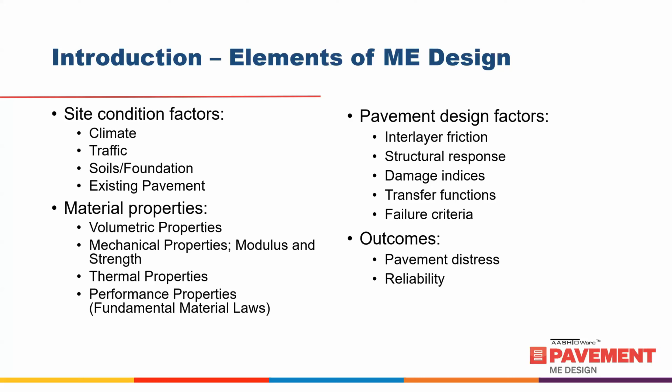There's also other design factors tied to your agency-specific properties, such as your failure criteria—when does a distress exceed that predefined failure criteria? And then the outcomes from this are your pavement distress and reliability. So these are the main elements of the ME design process and the different broad categories of inputs needed and used throughout the analysis.

And then how do those inputs and components feed into the final outcomes? It's a systems approach where you have your climate, traffic, layer properties, and design configurations. It feeds those inputs into a response model, which calculates your stress, strains, and deflections, depending on the models.

That data gets used within the transfer functions to define the fundamental material laws and damage. And then the damage is translated into your distress over time. So you'll have all of your distress prediction models and criteria.

So for flexible pavements, main outcomes are your bottom-up fatigue cracking, top-down cracking, thermal transverse cracking, rutting, and roughness in IRI. On the JPCP or rigid side, you have your transverse slab cracking, roughness, and faulting. And for CRCP, you'll have your punch-outs and roughness IRI.

So the question becomes, how are all these results presented to you as a designer when an analysis is complete? And that's what I'll focus on here for the next couple slides.

The summary of outcomes, the main goal of these reports, is just to summarize your results. That includes a detailed summary of the inputs used in the design and analysis. It includes calculated parameters such as mean values, aggregated on a monthly or even annual basis.

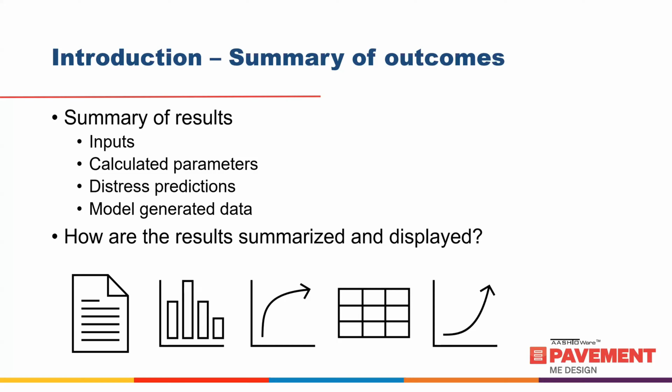So just a brief overview again of what outputs are available with a design run. With the last version of the desktop app and the web application, there's three main categories of reports output: your XLSX, your docx Word file, your Excel file, and then a zip download, which includes a bunch of other files that you've probably never wanted to look at.

It includes many different items that I'll go over in a minute. But these are your three primary outputs from the web app, and you can see a screenshot of how to download those once you have a completed design.

So to dive into each one a little bit more, there's two categories of output reports: the primary results outputs, and then a secondary result outputs. The primary outputs are what most are going to use on a day-to-day basis.

These include your Word file and your Excel file. Both reports contain primarily the same data. There might be some details in the Excel output report that might not be necessary or required in the docx, because you could just add a lot more detail of monthly values and so on in the Excel tabular form.

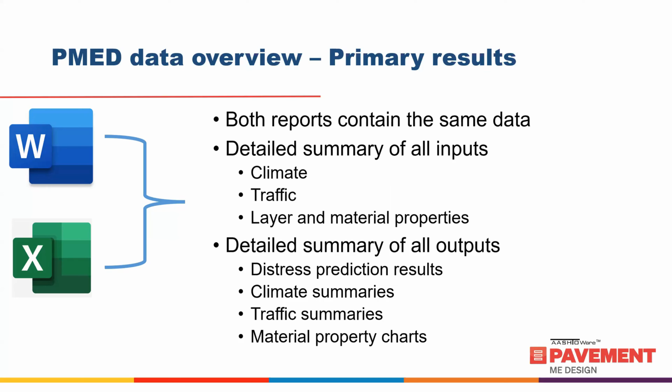Then within the secondary results, this includes, let's say, what you might have heard about in the past as intermediate output files. These are files not necessarily intended to be used as the primary source of outputs. Most of the data from these files are already included in the other reports in some way, and it's really an artifact of the original MEPDG software.

After 1.37A was developed, which relied on these files as an input and output for different modules, most of these files aren't necessary anymore at all. They're just an artifact of what was available in the past, and no changes have been made to those. It's just the way it kind of worked out, where they're still available for those who do want to use or rely on them for some reason.

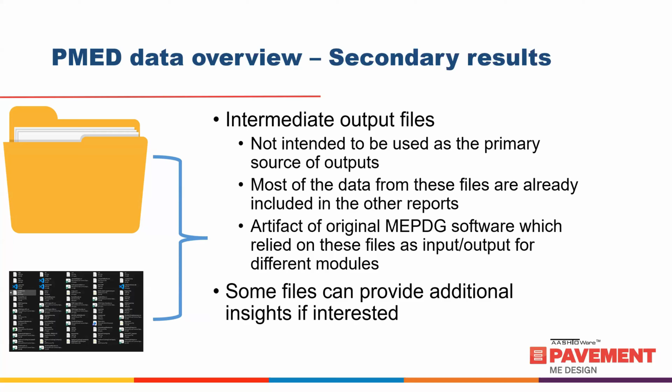And one benefit is some of these files can provide additional insights if interested. I'll provide a couple examples of that further on in the presentation itself.

So first, I want to do a detailed review and look at the different output reports. I'll go over the different sections, and then I'll just do a demonstration and scroll through an individual output report and show the different components.

So what I'll go over is the different headings. You have your design inputs, your design structure, design outputs and charts, which include your distress prediction summary and distress charts on the front page. Then you have detailed traffic inputs and charts, climate inputs and charts. You have your design properties and associated charts with those. You'll also have your analysis output charts, which add a few additional charts and figures to display some predicted results over time, whether it's distress or material values over time.

I'll show some of those. Then you have your layer specific information and input summaries for your asphalt, concrete, unbound materials, and so on. And then the last one is just a summary of your calibration coefficients and the transfer functions included. So I'll go into that right now.

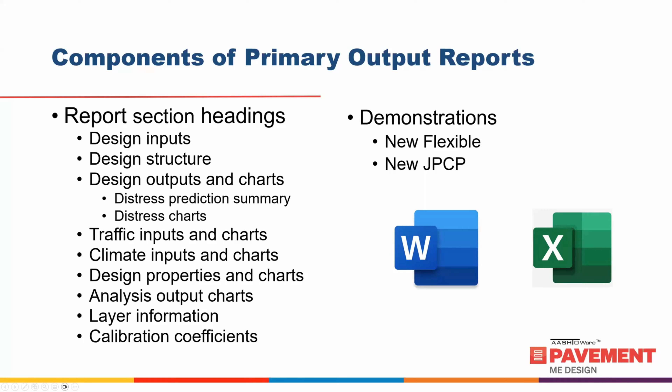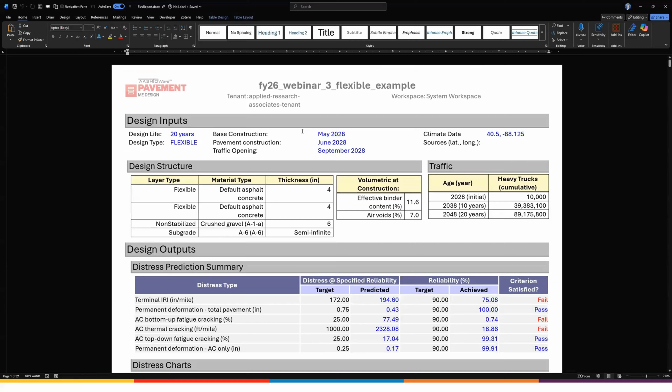I'll open a new flexible design. I wasn't saying anything. Wanted to open the flexible report and go over the different sections.

So first thing, you have your design inputs, which just summarizes some of your design life, your design type, base construction, pavement construction, and traffic opening dates, the general information. It gives you a brief overview of your structure itself.

So for this design, we have two asphalt layers, both 4 inches, over a crushed gravel 6-inch base and an A6 subgrade. It provides some volumetric at construction information, which is just tied to the first layer in the structure, the first asphalt layer. And then you have your heavy truck summary of your total number of singles, tandems, tridems, quads over the design period. So I created a very heavy traffic example here so that I can have some distress that shows up in the reports or the charts.

And this one, basically over 20 years, gives you a 20-year total heavy trucks.

The next part is your distress prediction summary. This is probably the most important of these reports. It shows you your target values, which is your distress threshold limits that you've defined in your design run, and each one for the different distress models. And then the actual predicted values associated for those models. These values are at the specified reliability.

So if you've specified 95%, that is going to be your 95% prediction value associated to the blue line on all these charts. It provides you your target reliability and then what was actually achieved. And then also the final one is criterion satisfied - did it pass or fail the specified limits? If it exceeds, it fails. If it's below, it passes.

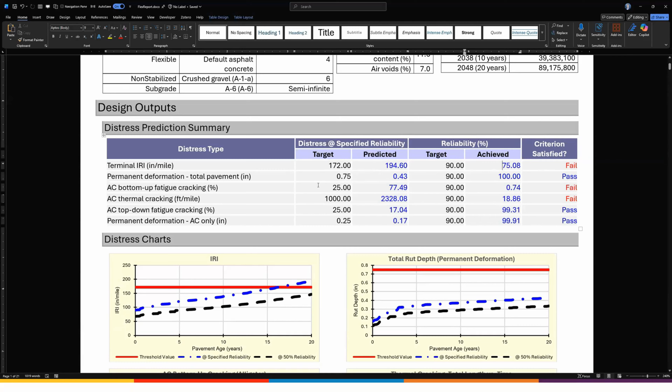Next part, your distress charts. So this is just a 4-figure summary. I know you can customize how these look or which ones show up in this first part. You're in the customized report section within the user interface, but primarily this just gives you a quick overview of how your design performed for these different distress models.

So in this one, we can see IRI. We have our mean predicted values, always the black line, as you can see here in all of these charts. And then you have the added reliability based on your 95%, or this one at 90% reliability level. So those are all the blue lines.

So the way I interpret this: okay, well, IRI failed at about 17 years. Rutting passed, no issues with rutting, but it's quite a high threshold. So depending on the threshold level, it can fail. If you have a very strict threshold level where you don't want any rutting above, say, 0.25 inches, then this design would fail fairly early in its design period.

Then for bottom-up cracking, at the reliability level we have about 11 years, basically it crosses about 10 years just to be safe. So we exceed the threshold of 25% bottom-up fatigue cracking at 10 years. And then for thermal cracking, it exceeds pretty early on.

That's kind of just a general review of what this page is. I'll dive into some of these little examples a little bit more of how this can be used for some planning and design decisions.

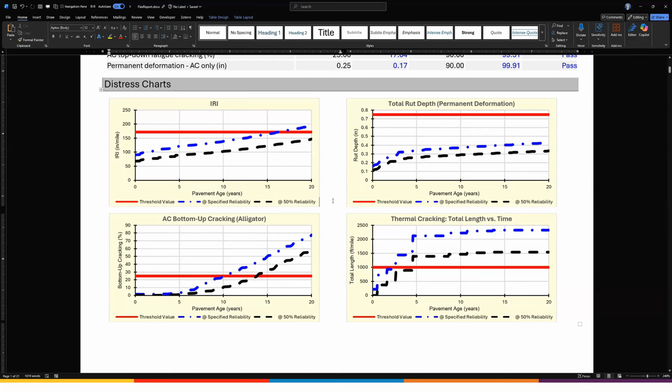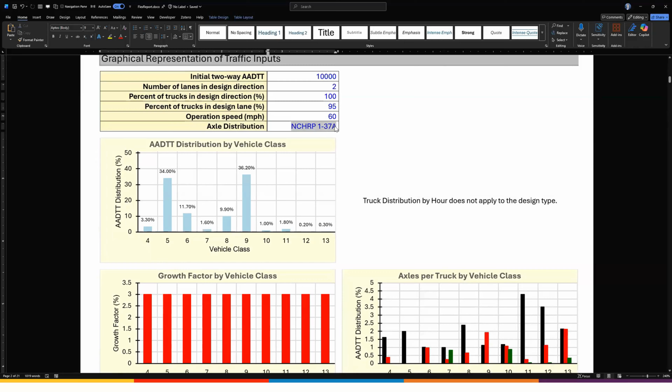Next part of the report is your traffic inputs. Basically it just summarizes what you've defined. If you have different axle distributions selected, it'll actually show which ones have been selected. If you use some of the predefined ones or your custom state-specific values, and charts of your AADTT distribution by vehicle class. You can see your vehicle class distribution, your growth factors by individual vehicle class.

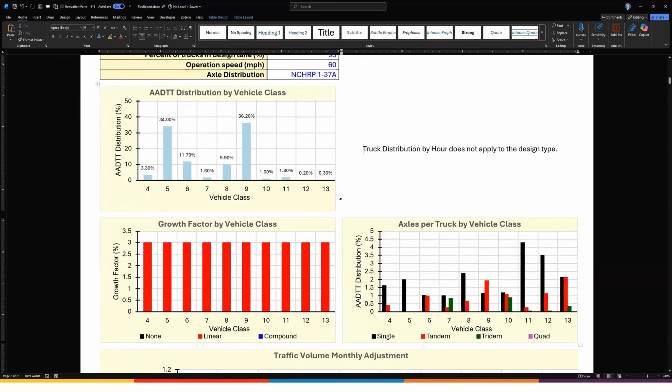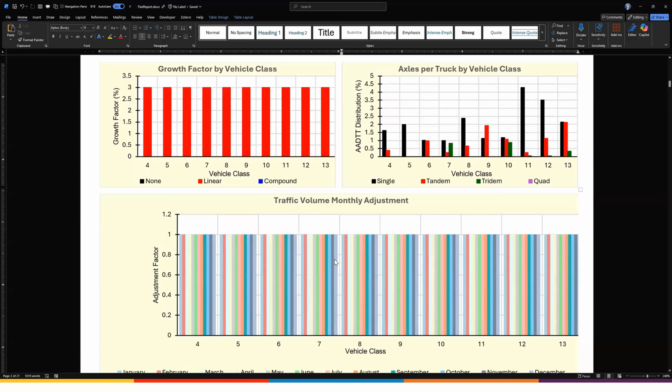These are just tied to how you enter the data in the inputs and your input screen. Your axles per truck by vehicle class, and then also just an adjustment factor, monthly adjustment factors if those have changed. I've used the default values here, so that's why most of these are kind of the same for everything. But many agencies have derived these values specific to their roadways and locations.

This next part is just a tabular representation of the exact same data shown on the previous graph. Then there are some axle configuration inputs that do impact your results, but typically are not adjusted unless you have specific data that supports different values.

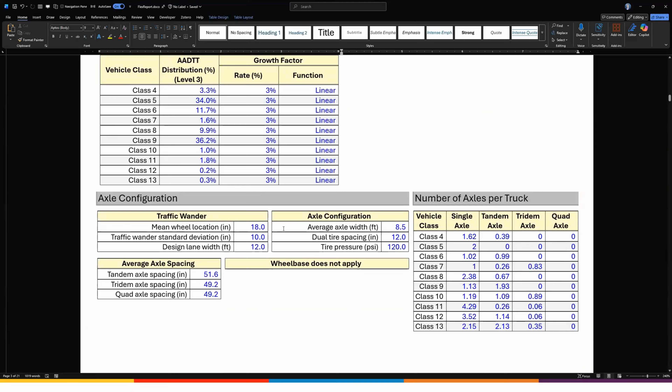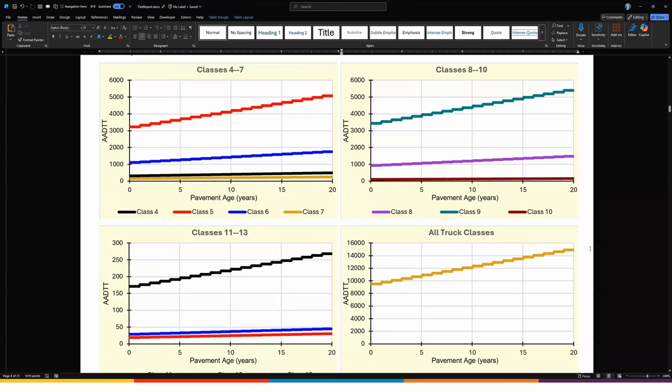Next is your average annual daily truck traffic and growth over time. The charts here specify your traffic over time for different vehicle classes, so you have vehicle classes 4 through 7 on one chart, classes 8 through 10 on the next, 11 through 13 on another, and then an all truck classes example.

And then this is also aggregated into a cumulative heavy trucks chart, combining all your heavy trucks into a single chart over your design period.

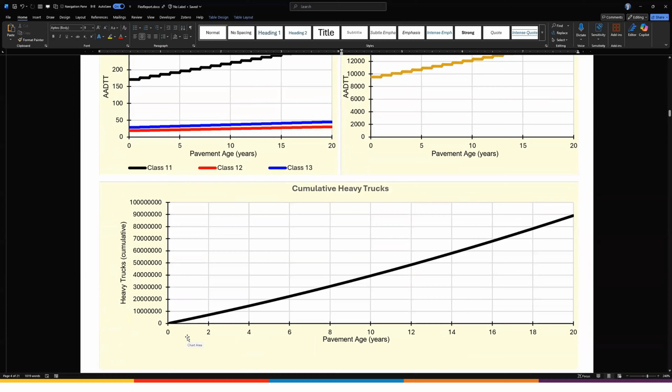Fairly recently, cumulative ESALs were added. Internally, Pavement ME does not use ESALs, it uses the load spectra data directly, but ESALs can be calculated from that data with an assumed value for your load equivalency factors for rigid and flexible. There are built-in defaults for those values, and this was a request quite a few years ago to add this as a reference, as additional information for comparison purposes in the design process. I want to reiterate that it is not used in the actual analysis run.

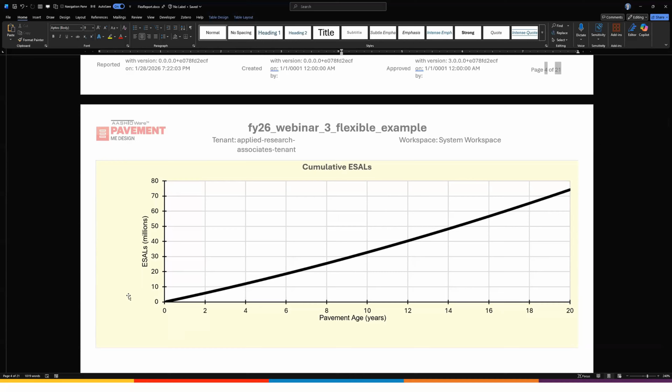Next part just summarizes your climate data. So here we have our climate station, I used the one in Paxton, Illinois. It has the mean annual air temperature calculations, your precipitation, your freezing index, and so on.

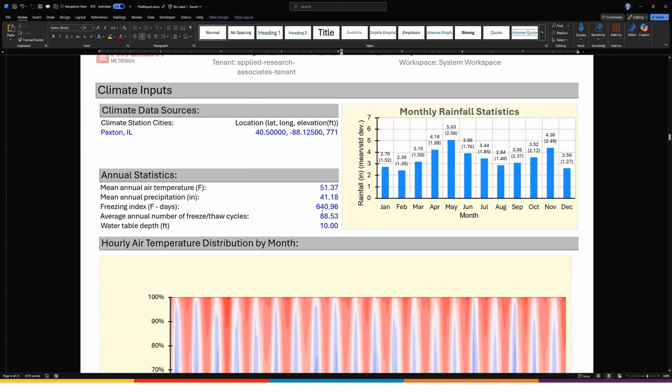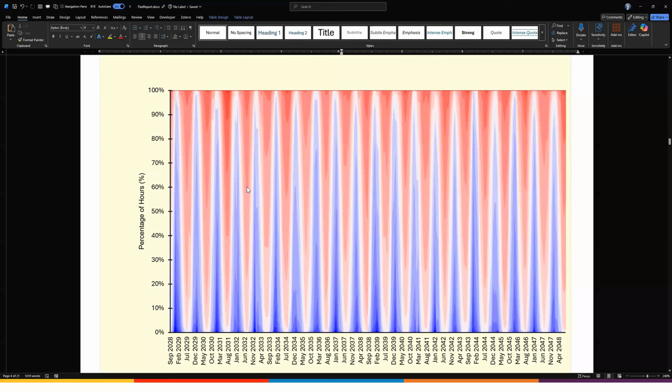Precipitation averages for every month, and then it has this kind of complicated graph of the hourly air temperature distribution by month. Especially for September, most of the temperature is going to be warmer, so basically a heat diagram for this.

Now, another useful section is the monthly climate summary. As you select a climate file, there's 30 or 40 years of hourly climate data, and then it summarizes that data into these charts.

So you have your mean monthly air temperature, your maximum for that month, and your minimum, so you can see how your air temperature is distributed over your design period. Similar thing with your monthly precipitation, wind speed values, your monthly sunshine, which is really percent cloud cover, and then your wet days.

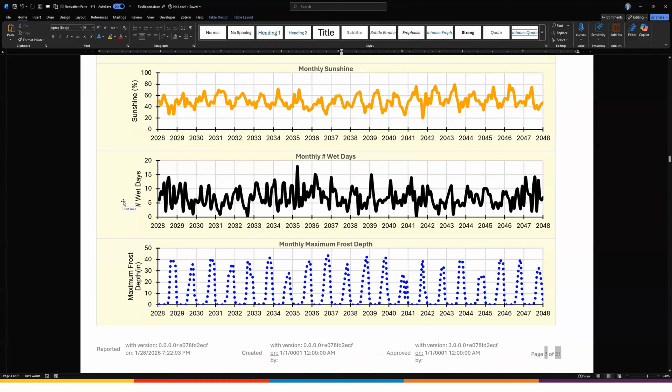And then the last one in here is your monthly maximum frost depth. The climate model within Pavement ME predicts frost depth and thaw depth over time, and this chart just gives you your maximum value for each month.

Where you can use this information is to see, okay, well, I know my predicted frost depth is 40 inches, do I need to worry about frost penetrating my subgrade layers? So that's how you can use the information to adjust your base and subgrade layer thicknesses to prevent frost from reaching the underlying layers of your natural soil. That's one benefit of these.

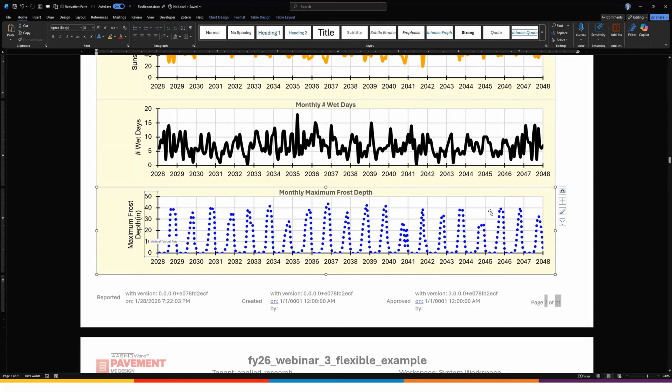With the newer reports, you can change these, change scales, and so on. I'll show you one of those in the next couple of sections.

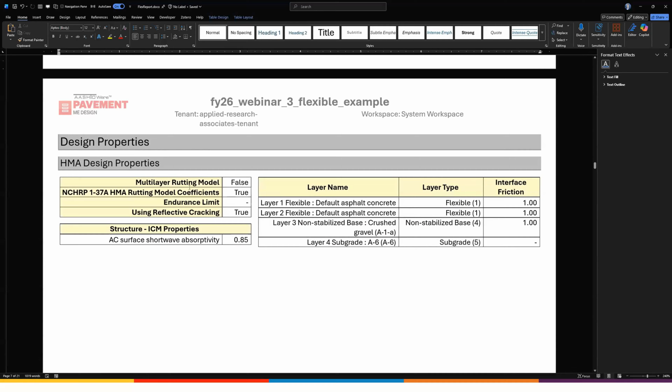The HMA design properties is just your interface friction. Most of these are just presented, but some of the nice data in here is your thermal cracking, which relies on your creep compliance input data and your indirect tensile strength. All of this is similar to the inputs you use for your top surface layer.

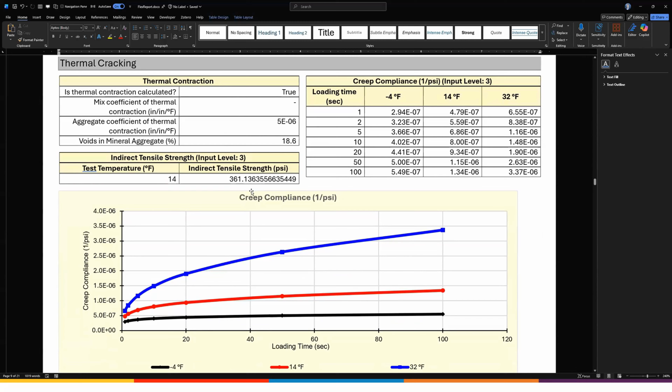And then you have the creep compliance master curve that is fitted to your input data. This was a more recent addition to the output reports to actually show you the fitted creep compliance master curve. This wasn't always available, and I don't think the desktop app has this available.

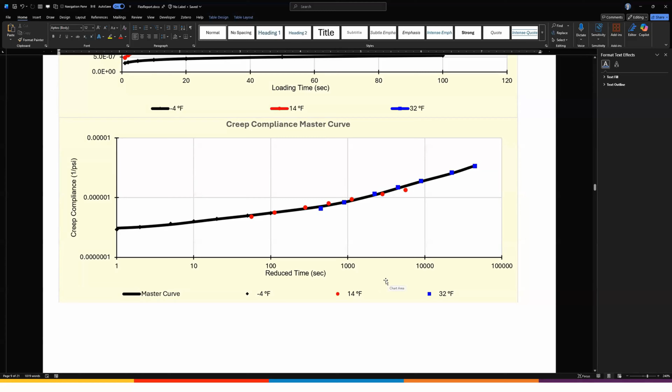And then you have the rest of your asphalt data, your dynamic modulus master curve information, your shift curves, and your viscosity shift factors. These are all presented for each asphalt layer that you have in your structure, and this data gets used in all of the flexible models themselves.

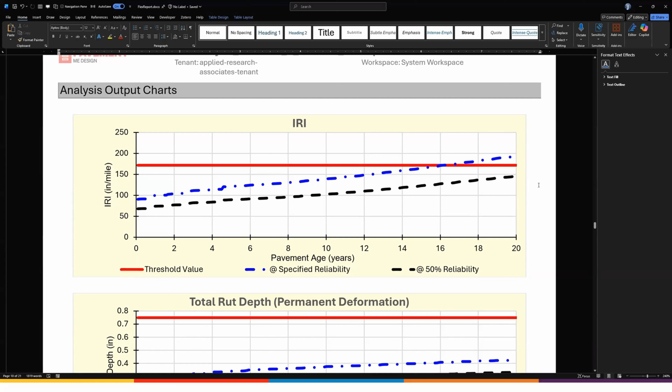Next part of the section is your analysis output charts. This basically reiterates the four charts from the beginning, but with a little bit more granularity, so you can see a few things a little bit better. The charts are bigger - they're not compressed like on the first page, but same idea.

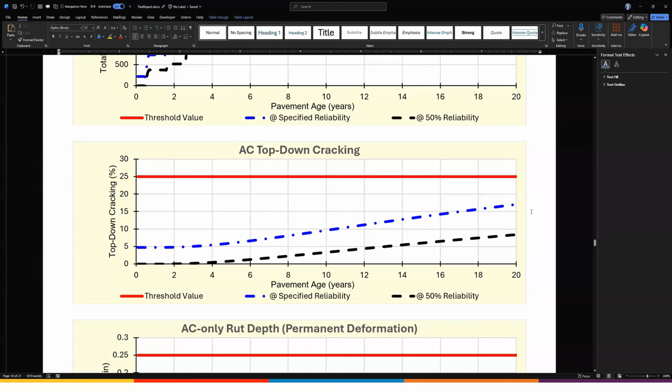IRI, total rut depth examples here. You have your bottom up cracking and then thermal cracking as well, and top down cracking. This is a distress you didn't see on the first page because you can only do four at a time, but it's an additional distress that you need to look at. It does show up in the summary report at the very top, showing what failed and what didn't.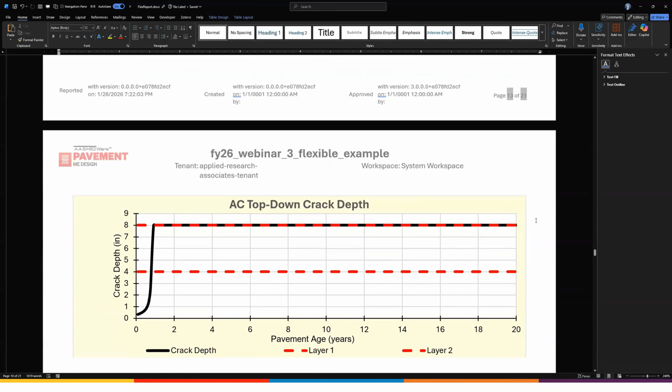You have AC only rutting and some additional charts you can't see in other places. It's more of your AC top down crack depth - the model predicts your depth over time, so you can see where your layers are and what time it's going to reflect through.

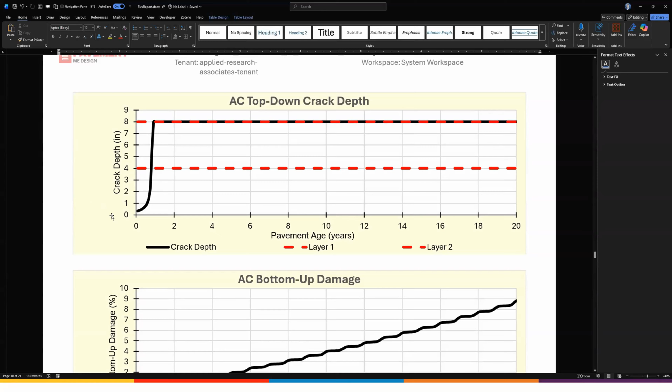Wouter, I believe we lost you. Sorry about that, you're back now. My mic keeps turning off for whatever reason.

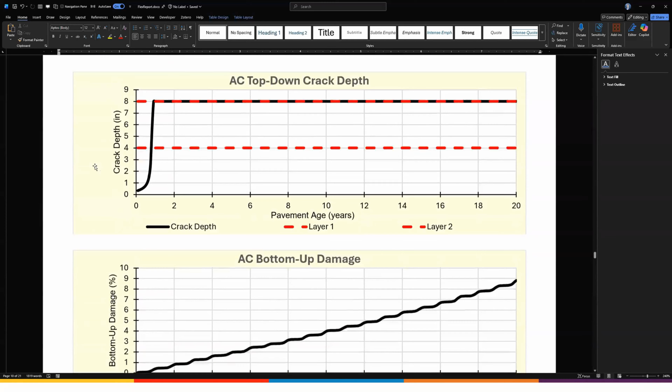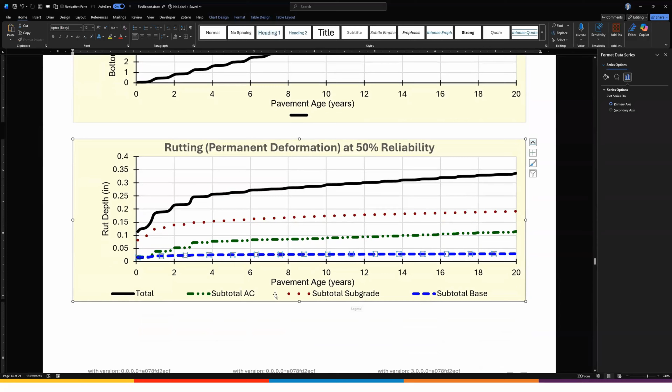So you have your top down cracking, you have your bottom up damage predictions, you have your rutting permanent deformation on the individual layer basis, so you can see what the model predicts for your subtotal base, subgrade, and subtotal AC.

And then some additional plots generated are your sublayer moduli for your asphalt materials. So if we look here, this is your dynamic modulus over time for your specific design. What's nice here is you can actually zoom in a little bit.

If you change some of your limits here, let's look at the first five years. There's different sublayers of your moduli, and it also shows the mid quintile. The asphalt model actually does five different quintiles to figure out where you're going to have the worst prediction based on the conditions.

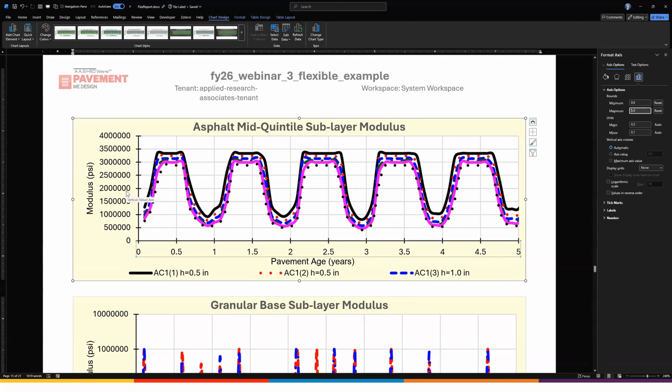So basically you have low temperature, mid temperature, high temperatures for each month and different moduli values. I'll provide a bit more of an overview of the sublayering in a couple minutes.

You have your granular base sublayer moduli over time. These are what get used in your analysis when it goes into the structural response model. I changed some of the items here to switch between logarithmic and normal scale.

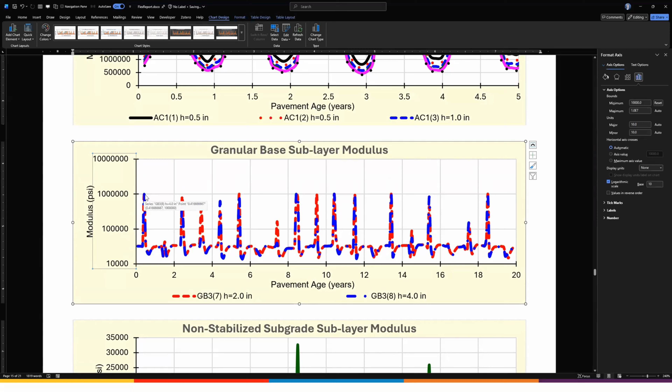You'll see these spikes of base layer moduli - that's about 1 million, which is typically representative of when you have a fully frozen subgrade or base material. And then you can see the equivalent here for your subgrade.

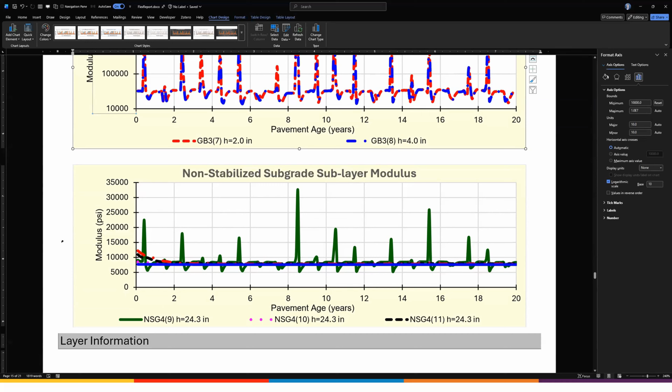Well, I know that at one point there may be partially frozen or fully frozen items, or times throughout the design period where your subgrade might be subject to frost. So these are nice outputs to help you make decisions and see what is available, and just help you plan for future items throughout your design.

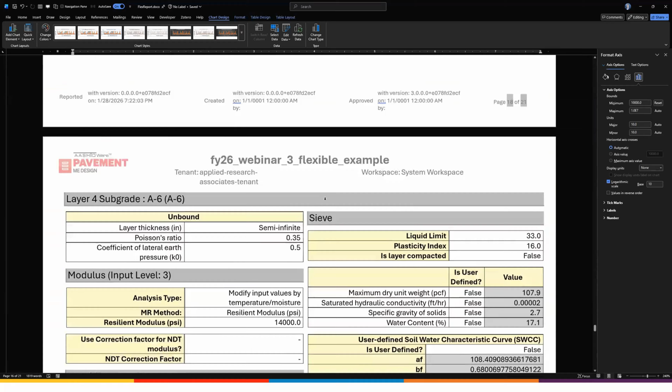And make decisions of changes and getting an optimized design. I'm not going to go into too much detail about the inputs, but they are all summarized here for every layer. And then the last part is your transfer function and equations and calibration coefficients associated with that design. So that's it for the new flexible.

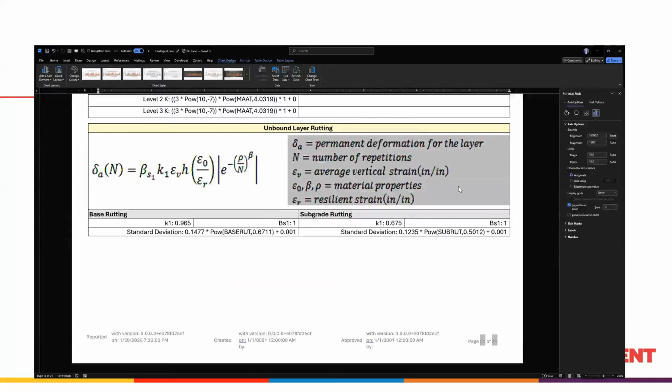I'm going to quickly go through a JPCP report, but as you'll see, most of the stuff is the same. IRI, faulting, JPCP transverse cracking - all those are shown. Traffic is nearly identical, except this has hourly distribution because that matters between top down and bottom up transverse cracking.

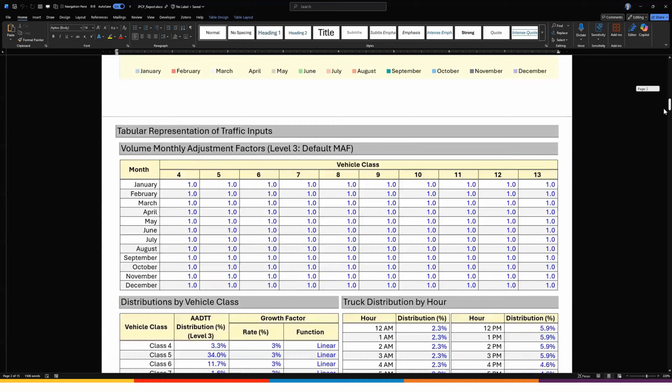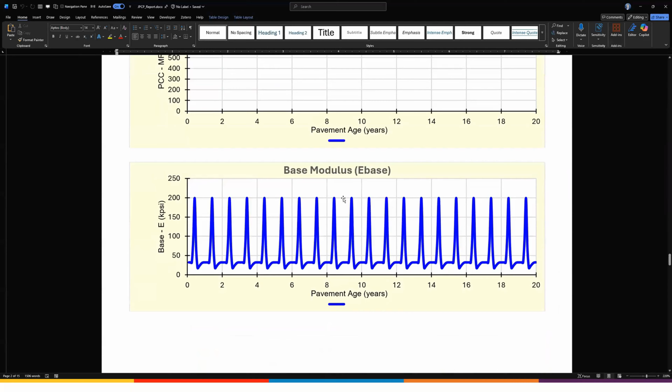Then we have - I'll just scroll towards the bottom. The only additional charts here are your PCC moduli, your flexural strength, your base modulus, and your subgrade dynamic K value. So I know I'm going through these pretty quickly, but they're mostly the same as the flexible, except for what the PCC design models use.

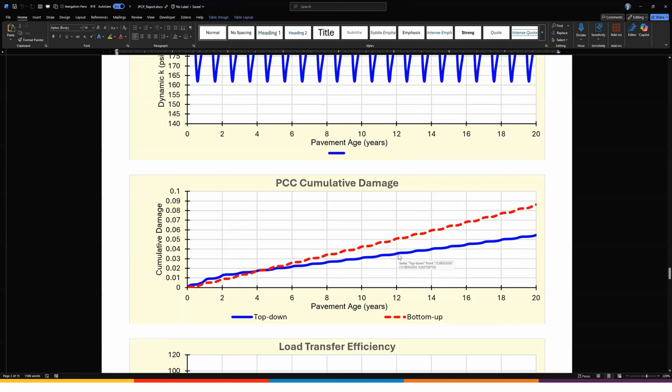And then you have your cumulative damage. The blue line here is your top-down damage, which is mostly nighttime when the slab curls, depending on daytime and nighttime temperatures - so it either curls up or down. And then you also have your bottom up.

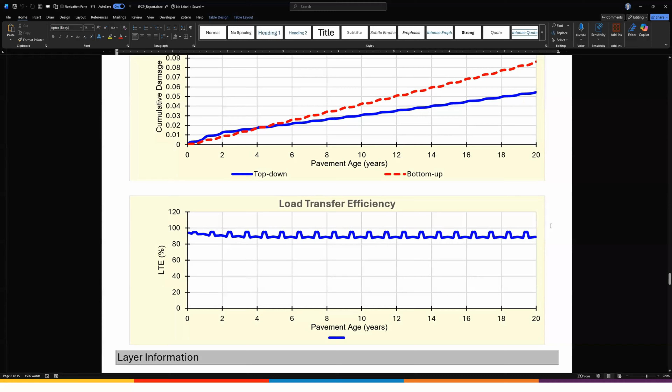Another item unique to the JPCP is your load transfer efficiency. These items help show how your dowels are performing. It's typically not an issue when you have dowels - your load transfer efficiency is going to be quite high, and this directly impacts the amount of faulting that the model predicts. Then it's just the layer inputs like we saw for flexible. So that's a pretty quick overview of some of the rigid or JPCP items.

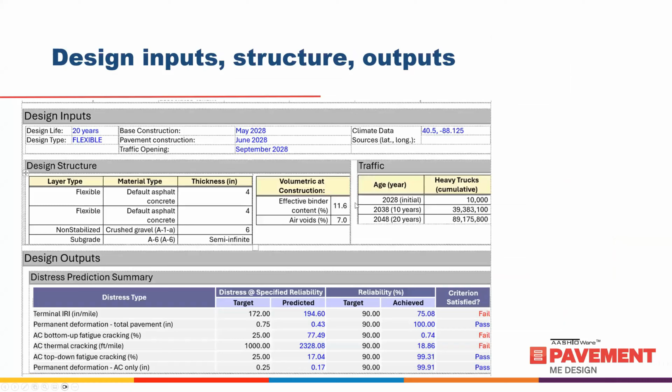Now I want to get into some of the other items. I'm going to skip through quite a few slides here because they're just backups.

Now the other section I want to go over is the intermediate output files. Just as a reminder, they're not intended to be used as a primary source of outputs, as they're artifacts of the original MEPDG, but there is value in these - if you want, you can dive into them and they can provide some additional insights if that is something that you are interested in.

Some examples of these files that you'll see in here: your pavement temperature with depth for the bound layers, so your asphalt temperatures on an hourly basis - what does that look like? Your temperature gradients throughout your structure for flexible and rigid. You have fatigue damage, your bottom up or JPCP cracking and faulting files. You have your dynamic modulus master curve outputs. You have other EICM related temperature data, your Thornthwaite moisture index calculations, the traffic calculations, and so on.

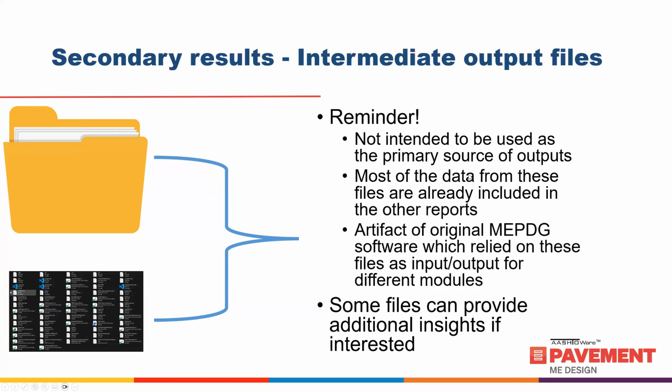Some are more beneficial than others, but I'll go through one that might be of interest to some, and that one is the fatigue damage file. It's a .fat format. This file really summarizes the total fatigue damage at different depths and analysis locations from the analysis module within the flexible design.

The total fatigue damage is a function of your load repetitions, your monthly load repetitions over your total allowable load repetitions - so it's the N over N, your damage function. The maximum value on a monthly basis from these is used to predict your bottom up fatigue cracking. The damage values represent the sum of all your axle types - singles, tandems, tridems, quads.

Just to give some background information, when an analysis runs for flexible design, we have a structure here. We're really just looking at your axle configuration - this is a single axle with dual tires. The origin runs through the center of those two tires. We analyze one half of that, because we know the other half is the same. Then tandems, tridems, and quads are analyzed through superposition based on this single tire location in the analysis structural response run.

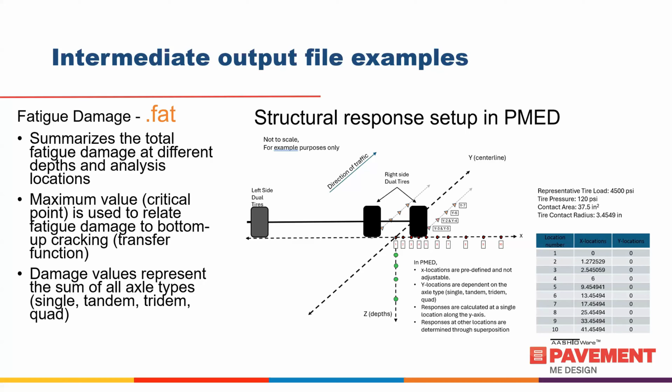Within this .fat file, there's a text file with data - a bunch of different lines. The first part is your number of sublayers and the sublayer depths. The next part is your number of analysis locations that I showed previously, where you have analysis location in your X direction. Then the items down here are your number of months - so it's a 240-month design. And then you have your fatigue damage data corresponding to different depths and analysis locations.

A brief overview of at least the sublayering: your structure itself has layers, and then you have sublayers. The layers themselves are divided into sublayers based on what the 1-37A came up with for the flexible analysis. So you have this particular structure - one of these structures has two asphalt layers, a base layer, and a subgrade. The asphalt layers: you have a 4-inch surface layer and a 4-inch leveling or base layer.

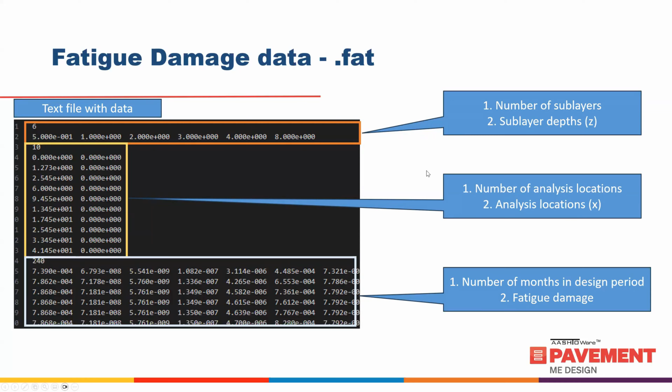Now the asphalt is subdivided into multiple sublayers based on different depths throughout. So the first one is 0.5 inches, 0.5 inches, and then it's basically 1-inch increments until the depth of 4 inches, and then 4 inches until 8 inches is basically a single sublayer. That's where you can kind of see in this previous one where we have 1/2 inch, 1 inch, 2 inch, 3 inch, 4 inch, 8 inch. So those are the different sublayers for the structural analysis portion, and then there's logic for the unbound layers themselves.

Now I went ahead and used that data, adjusted the file, copied the data into Excel, assigned the depths and analysis locations to each damage value, and then plotted the results for your structural response, or total damage, as a function of your analysis location.

So what you can see here is, at least...

Hey, we may have lost you again, Wouter. Yep, sorry about that. I don't know why it keeps timing out, but I was prepared it might happen again. I think it's on a timer. But anyways...

So we can see here the different lines represent different sublayer depths. I have your surface layer, which is this first one. This is not going to be your critical response. So you have 1 inch, 2 inch, 3 inch, 4 inch, 8 inch, and 10 inch in this example.

It's not the same example as the previous screen, but as you can see, I looked at the last month, at 240 months. Your maximum damage occurs at the 10-inch depth, basically at the bottom of your asphalt layer, and the maximum distress happens right at the origin, between the two wheel loads. So that's how it ended up for this design, but it can help give an idea of where the critical damage is located.

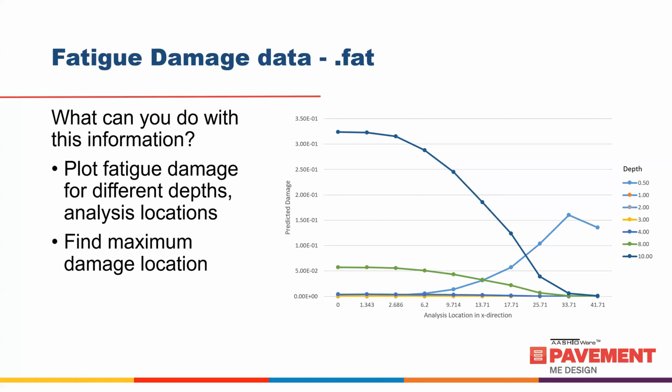Now, another example of how this data can be used: I ran an example with full friction versus no friction between the different layers. On the left, there's a full bond between the two asphalt layers and the unbound base. On the right, I set that value to no friction to see how the model reacts and how the damage is different.

As you can see, with the full bond, the critical locations are closer to or right at the bottom of the asphalt layer, at the bottom of your 8-inch total structure. On the right, because there's no bond between these two layers, you can see that ends up being your critical response location.

So if you have weaker layers, it's not always going to be that the critical response is at the bottom, depending on how you define the condition of that friction or bond between the two different layers. This is just to illustrate some of the differences between these files and how it does impact your outputs — you can see some differences there.

So as you can see, I just put here the max location. They are different between the two because there's no bond between the two asphalt layers.

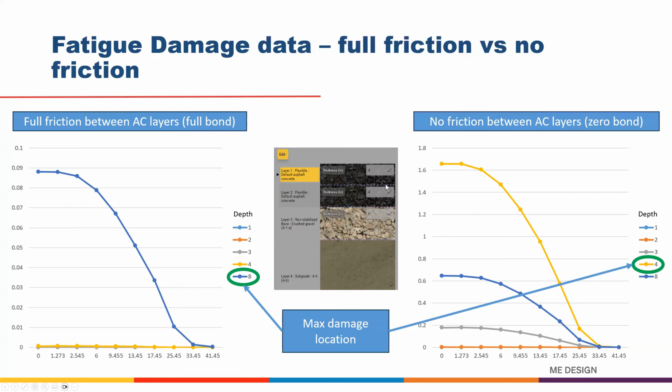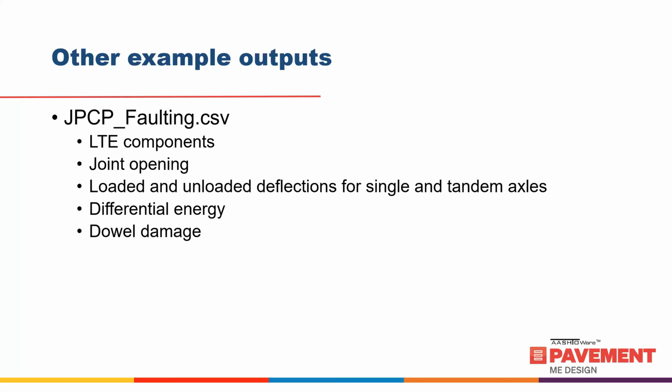Some additional examples that I put together here. For JPCP faulting.csv, it's an intermediate output. It has your LTE components, joint opening, loading, unloading, deflections for singles and tandem axles, your differential energy, and your dowel damage — all on a monthly basis. So you could actually do some plotting there if you want to see which components impact your predicted faulting the most.

So here's an example of your load transfer efficiency. You have the PCC LTE, which is really the combined effect of your concrete and aggregate interlock within your concrete structure, your dowel-specific LTE, and then the total. And then the differential energy — this impacts the faulting predictions over time. It also predicts your joint opening and dowel damage.

Just an example for your JPCP cracking — bottom-up damage by axle type and top-down damage if you want to look at the different components. As you can see, they can be plotted next to each other.

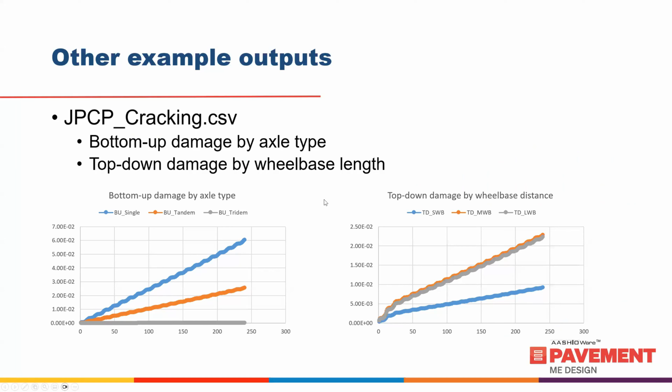These are not an output by default — you have to do these yourself. I mean, you can open the CSV and just create the charts with it. There's quite a bit of good information there. You can also see your PCC strength gain over time, and so on.

So another example to use some of this information: you can use the distress predictions and the year when thresholds are exceeded to help identify potential future maintenance or rehabilitation activities. As we all know, all pavements will require maintenance and/or rehab eventually. You can use the agency-defined thresholds in conjunction with your maintenance schedule criteria, whether that's based on current condition or a specific standard schedule, say every 10, 15, or 20 years.

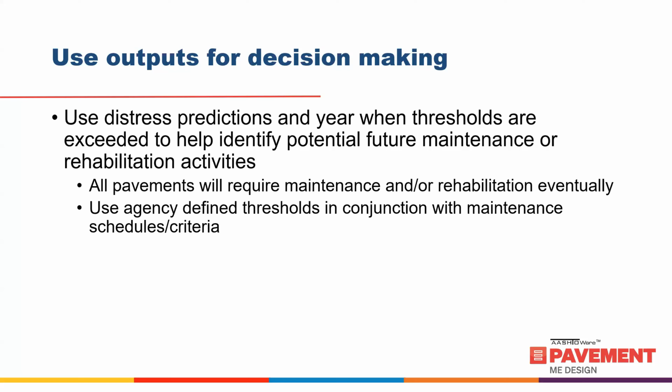One way to look at that is you can string together multiple designs, where you use the outputs from your new design, the predicted outputs, to define the existing condition for your overlay design. That's one of the most critical things in overlay design: how do you characterize and define the condition of that existing roadway.

So say we have our distresses here, we can use the information from these predictions to define the existing condition of an overlay. If you want to do the chained approach for the entire life cycle of that asset or pavement location, you have your fatigue cracking, rut depth, and thermal transverse cracking as inputs needed in the overlay module. You can use your predicted results and the age when those thresholds are exceeded as a guideline, and use this for long-term planning purposes if needed.

Just an example: once we have this new design, we know it's going to crack, it's going to exceed the threshold at about 11 years. What's the distress, bottom-up fatigue cracking, at that time? You can see that's an input in the rehabilitation design. And also, if we have thermal cracking, that also feeds into this point.

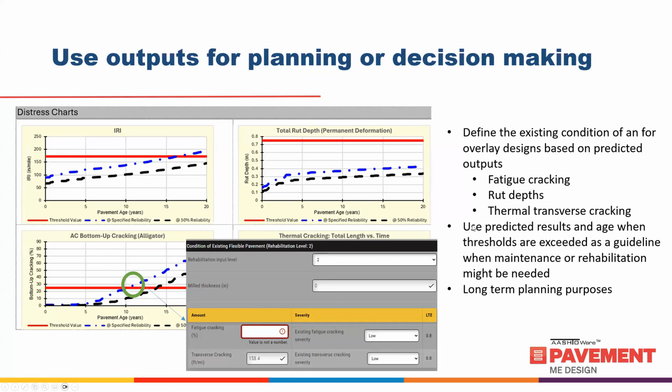The rehab modules also require your layer rut depths, and Pavement ME predicts asphalt rutting, subgrade rutting, and base rutting. Those impact your future overlay designs, so it really matters, especially to define the strain state at the time you're doing an overlay.

So in summary, this is a lot of information. AASHTOWare has many inputs and many outputs. Primary outputs include the DOCX and XLSX reports. Secondary outputs include some of the intermediate output files in the output folder. These output documents can be used to analyze results beyond what's currently there—create additional charts or figures, and assist with decision making during the design phase to provide additional insights.

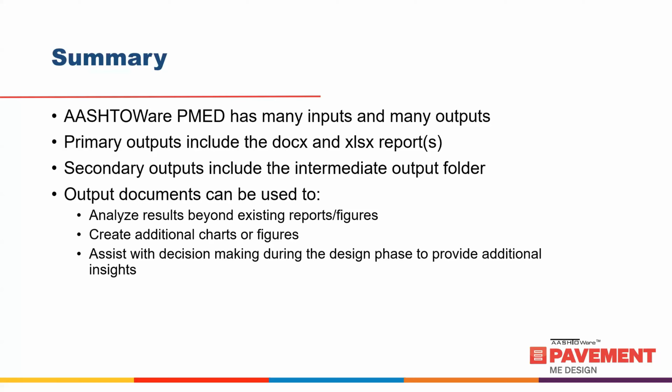So that's it for the data items. I want to now quickly do a demonstration of the new structure builder that was recently released. The remainder of the webinar will cover that, and I'll go into it now.

Okay, as many of you know, here's our main page. I didn't change anything, I'm already logged in here, but what I'm going to do is go ahead and create a new design. I'll just call it webinar demo and create it. So now we've created it, I'll open the item itself. Let me zoom in a little bit so everybody can see.

The first thing you'll notice is there's been a rearrange of the different components within the menu here. You'll see general information, which used to have a bunch of other items, now it's just your design name, design life, and what units you want to use. Next in line is traffic, your climate, and then structure. You might notice, well, there's a bunch of things missing—and that's by intent, because once we define our structure and traffic, you can input there. For climate, I'll just select a random location here, close to where I'm at, just to get the red exclamation point out of the way.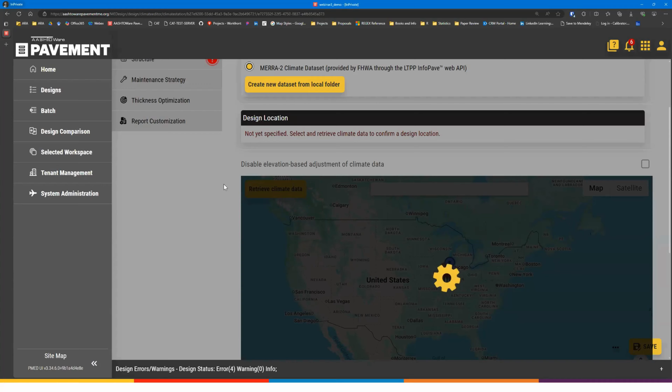And there we go, now we go into the structure builder. This is probably the biggest change you'll see. Instead of selecting a dropdown of new, overlay, recycle, all these different templates that were built into the system, now you can build your structure from scratch or use a predefined template by itself.

On the right here is your library, separated by templates and materials. The first is templates, these are complete designs, or at least designs that will be able to run, similar to when you created a new flexible design in the old structure definition. You have new, first overlay, multiple overlay, or recycling strategies defined here, and those are all in here.

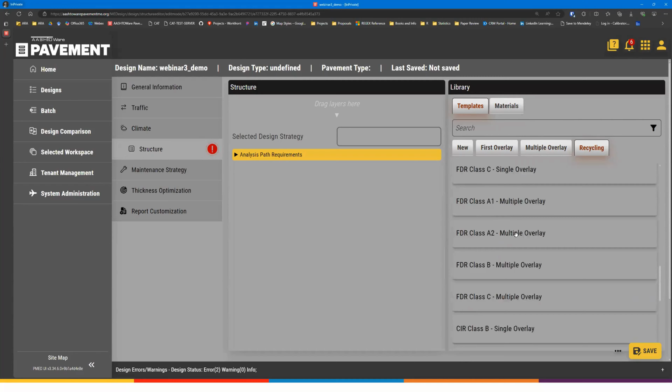There are two ways to do this. Click on apply template, it's going to pop up a warning that everything will be removed, all the surface layers, and then you click apply. Now you have a structure. By default, based on this structure, the software will tell you that this is the only valid design strategy for this exact structure, a new flexible design. Okay, well, maybe I want something else in there.

Now we can customize these no matter what. So once we customize and add different layers, we can go to...

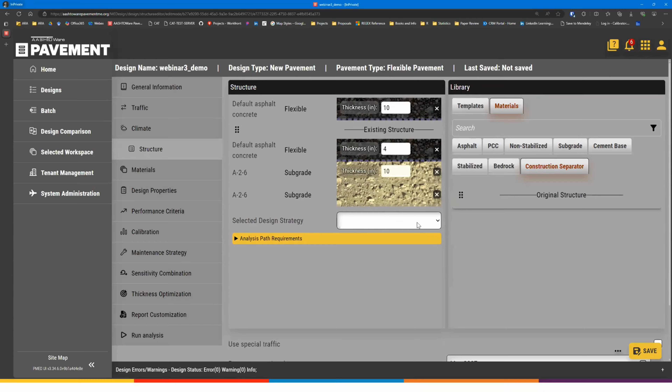But now you'll notice that the selected design strategy is blank. Okay, well, what does that mean? That means there are multiple options available for your current structure. Once you click on that dropdown, we'll see we have AC over AC, AC over AC with seal coat, AC over AC with an interlayer. So then you have to select which design strategy you want, and the rest will fall into place for the materials, your design properties, performance criteria, and so on.

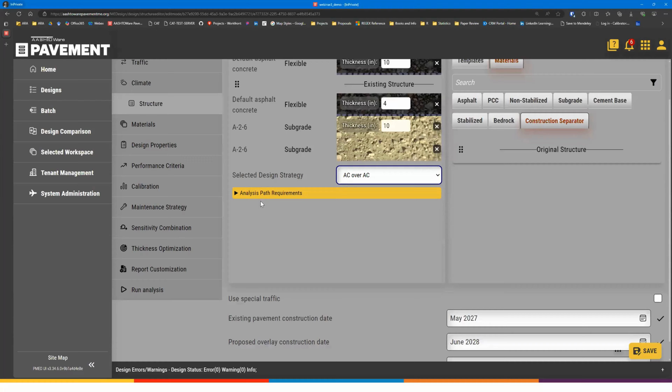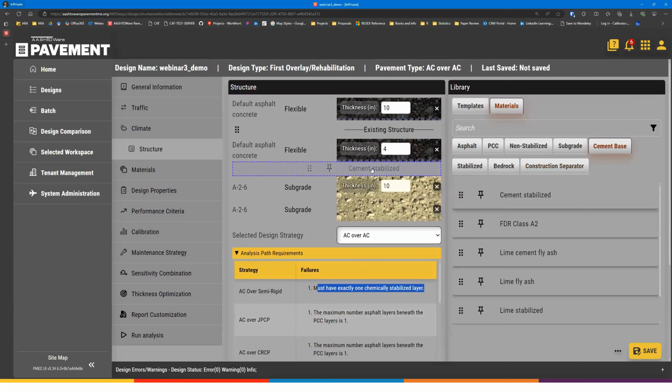There's some additional guidance here with the analysis path requirements. This gives you, if you want to build an AC over semi-rigid design, okay well, you have to have one chemically stabilized layer. So if we want that particular design, we can go to our cement base, add a cement stabilized layer, and now this particular structure is an AC over semi-rigid. There's no other design strategy or analysis path that can be defined for this particular structure.

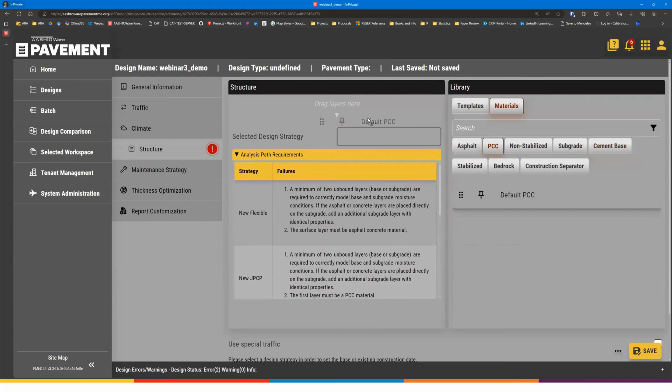One other example, say if we want to start from scratch here, let's put in a PCC layer, I want a non-stabilized base, just put an A-1-a, and then a subgrade. Oh, so that didn't go in there. Okay, so now you see, we have a PCC layer, non-stabilized base, and subgrade.

So what we haven't defined is if it's a JPCP, CRCP, or what is it. And that's where this is kind of nice, where you just put in the layers that you have, and the software will tell you what available design strategies are available. So now I'm going to just select new JPCP, and the rest gets filled in, and so on.

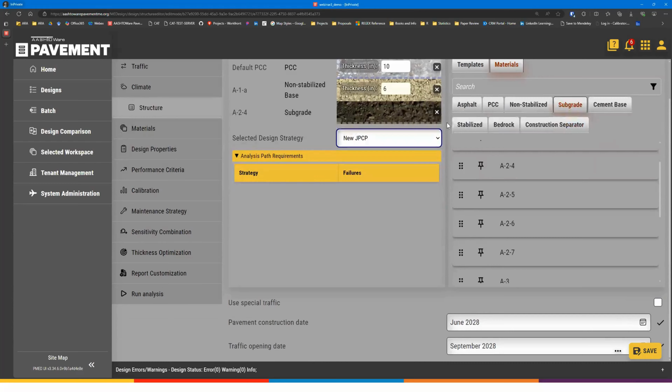So that's kind of a very quick overview of the structure builder itself. It's a change compared to how it used to be, but I think it'll lessen some of the confusion in use cases where you have recycling layers for your full depth reclamation, cold in place recycling, all these different strategies that were added as part of the multiple overlay and recycling strategies a couple years ago. The rest remains the same. It's just a different way to build your structure and let the software tell you what appropriate design analysis paths are allowed for the structure that you have built.

The rest is, like I said, identical. Your PCC, once you get in the materials, you can still change there. If you want to edit your structure or the thicknesses, you just click on edit. It automatically takes you back to your structure builder section. And yeah, that's really it for the structure builder itself.

I'll go back to the presentation. I have some placeholders here for the templates and drag and drop.

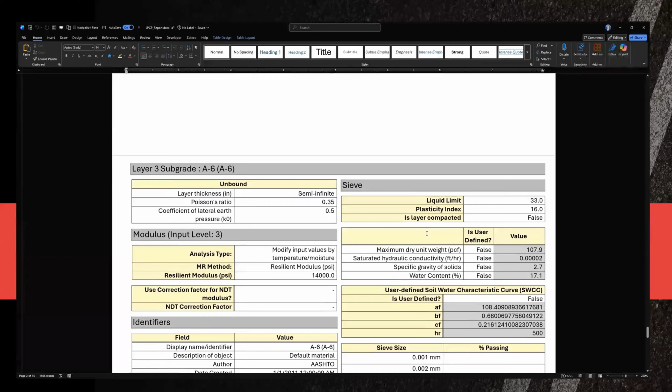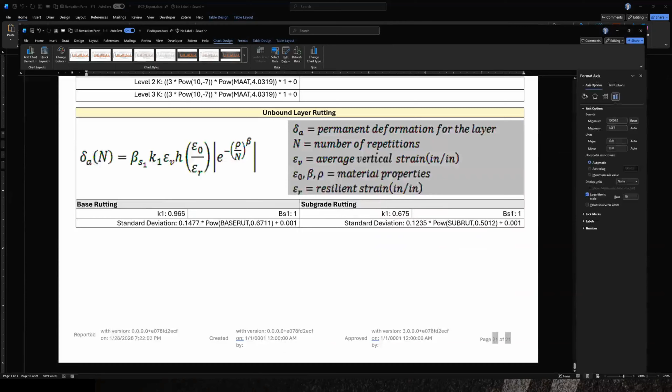So if you look at the flexible report, you'll see here that some fail. It's just a reverse calculation of what's your actually achieved reliability percent compared to your threshold limits. It's a good question, I don't think it's very clear how to interpret that data to most folks. So that's something we can take down as a note for a future explanation in the help manual or somewhere else.

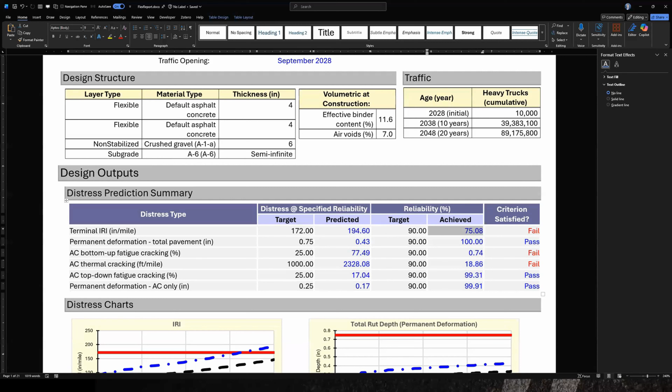Hey Wouter, can I quickly answer that? Sure. That comes from the standard deviation. If you look back at the previous file, the PCC one, the first one, terminal IRI, you can see how the predicted is so far from the target, and that's why you see it's 100%. It's like multiple standard deviations away from the target. But if you look at the faulting, 0.1, it's passed, but it's close to the target of 0.12, so it's only two standard deviations away. There's a standard deviation formula shown later in the report that's used to calculate it. So it's basically some statistical analysis between the mean and the standard deviation used to calculate the reliability.

Thanks Sri. Wouter, the last question is how one can decide the threshold values other than provided in the manual of practice. That's really an agency specific decision based on how they design their roadways. When do they continually perform rehab designs or do something to that pavement? That's really what it needs to be tied to - what level of performance, and at what time you're going to do something to that roadway. The manual of practice just has generic values that can be applied, but it's up to you and the agency to define those threshold values. So it's hard to give a specific number or criteria, but these need to be agency specific and defined based on what you're seeing on your roadways and how they perform.

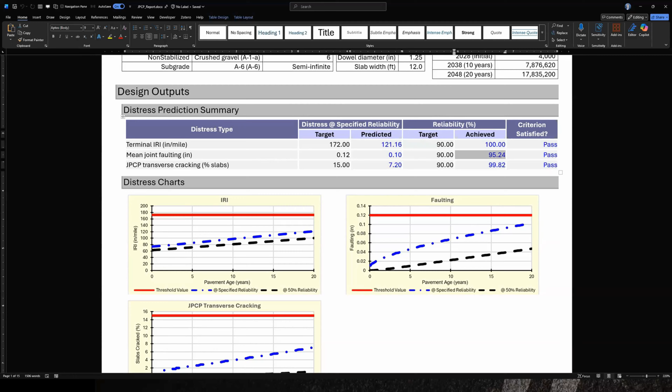Thank you, Wouter, when we are done with all the questions. Yep, hopefully we answered everyone's questions.